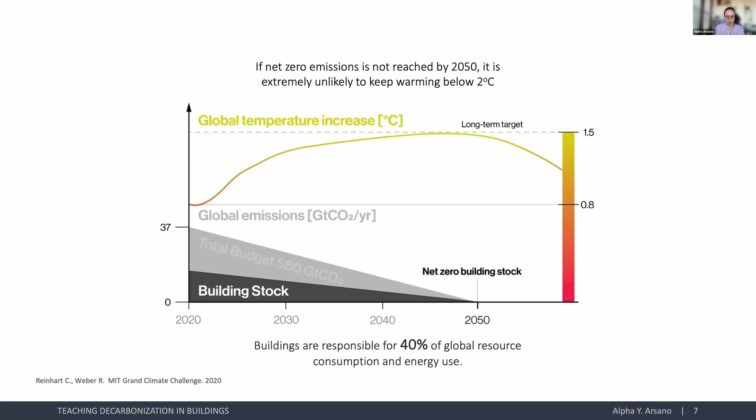And thinking about limiting global warming to less than 1.5 degree or 2 degree centigrade by 2050, we know we have to think about decarbonization. That's the only opportunity, building net zero buildings, retrofitting buildings, where we can get to that goal. It's just reiterating the theme of the conversation we have today.

So really, this leads me to think about, I think Emery has very nicely articulated it in his presentation, the importance of design. So it's not just about technologies, but it's also about really giving the platform for good design, efficient design. So empowering architecture and evolving the design attitude is so important. I believe it's important for us to always think about passive strategies as much as possible and always complementing with technologies whenever it's needed.

So as an illustration of that, part of my work has been developing an online web tool to support bioclimatic design rather than only focusing on simulation tools, which require some computation power of our gadgets, or even some knowledge or skill to run the simulations. Creating a web app that can be accessible anywhere for anyone who has access to, say, a cell phone or a laptop that's internet connected, to give them the opportunity to explore various building strategies would be so helpful.

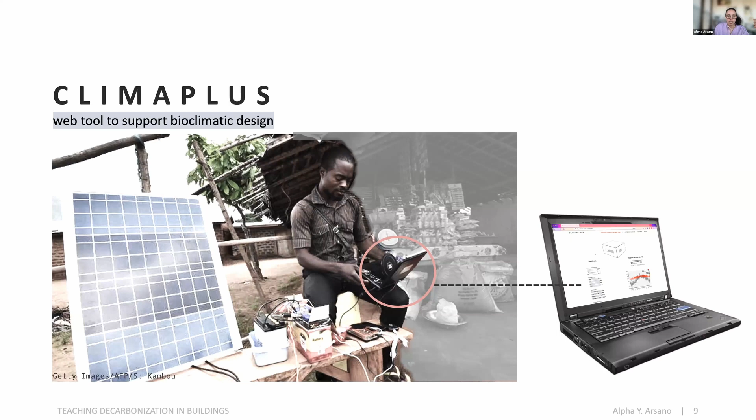An expansion of that is really implementing such an approach even in the learning space. I think taking students through these three different stages of learning is quite critical. So the first part, of course, we emphasize skill building, and the basic physical principles would be learned.

And then the opportunity comes to apply whatever they learned through evidence-based design, which could be using this web app or using these BIM environments for building performance simulations. And third, the goal would be to take them across, applying what they learned and perhaps come up with new innovative ideas in their course projects and assignments.

So one approach to really teach them about the different sustainable building strategies and the importance of decarbonization is implementing different games in a classroom. So instead of just providing assignments, my colleagues and I have been using gamification as a way of teaching. I'd like to present three different games or challenges that could be used in a classroom, or the games that we've been implementing in a classroom.

The first one is a climate game, then a simulation game, and then an alternative for the simulation game, a ClimaBox challenge. So usually the ClimaPlus would be administered at the beginning of the course, where students are yet learning about different parameters of the climate and learning to read different climatic charts.

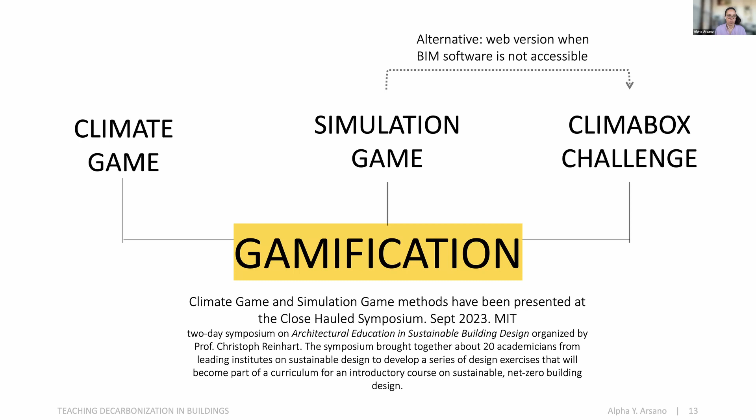So the first two approaches, the climate game and the simulation game, have been discussed and presented at the symposium at MIT last September. And perhaps there would be more documentation coming out of the symposium. So to dive deeper into these different games, the first one, the climate game, is quite interesting. It's the simplest, but at the same time, it's the one that sparks so much conversation in a classroom setting.

Now we know climate data is publicly available. We have more than 3,000 locations made available on climate.onebuilding.org, which can be easily downloaded. So we give students the challenge of identifying a location, comparing climate, describing it, and also coming up with some design strategies. So what happens is we prepare a couple of climate boards without disclosing their location.

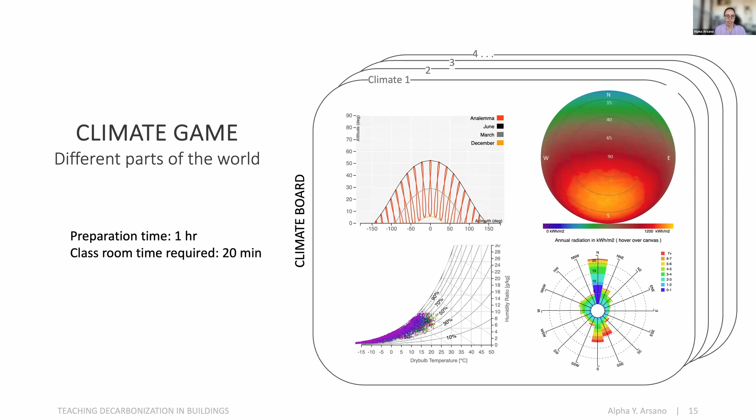Usually the preparation for the game could take about 1 hour for the instructor outside of classroom, and it could require about 20 minutes to run the game in a class. So once the climate boards are prepared, we ask students to look at all the climate boards, we give them a series of options of locations, and we ask them to match them.

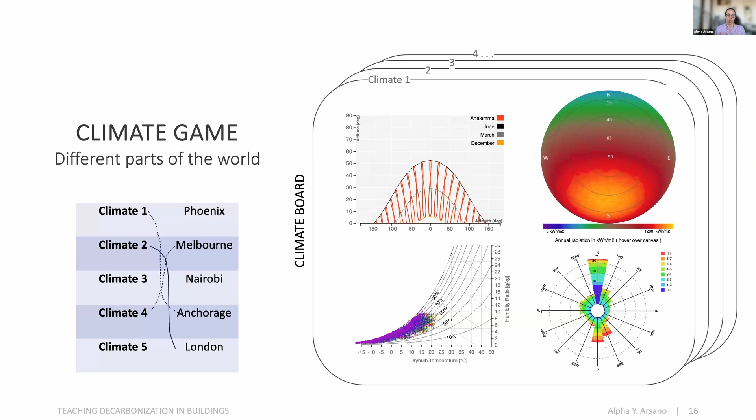So they would now have the opportunity to look at, okay, what's the sun path? They look at the psychrometric chart. They look at the cumulative radiation map, wind charts. We provide temperature charts. And usually, once they have spent some time exploring the charts, they should be able to identify which climate board belongs to which climate or to which location.

But we learned that, for instance, Phoenix and Nairobi were confusing for most of the students. And we also identified that wind charts are usually the most difficult to associate for students. But in any case, we would dive deeper into any of the climate charts, spend some time really investigating which climate could be identified and which parameter they should really look into. So this becomes a fantastic opportunity to really think about bioclimatic design, like the early stage identification of climate parameters.

So I personally use the ClimaPlus web app extensively for my teaching, but the CBE Clima tool, which is out of the UC Berkeley lab, is also very powerful. People could implement the Ladybug tools. It's also possible to use Climate Consultant. There could be different options out there. These two web apps are the ones I'm very much familiar with, and it's possible just to compile various climate files into climate boards to really create the game.

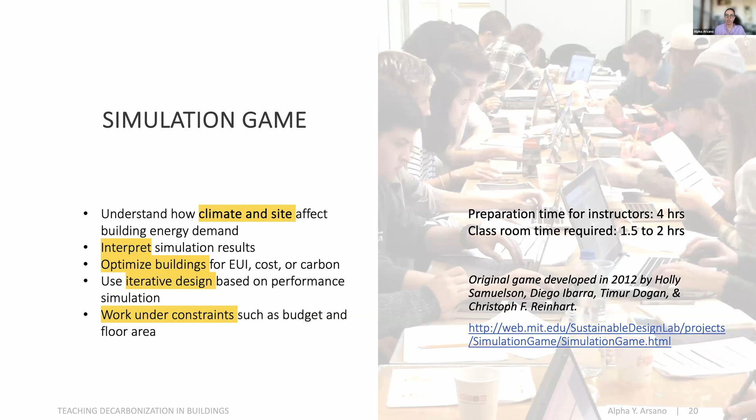They would learn how to translate and interpret simulation results. They'd also explore EUIs, cost and carbon as a way of optimizing building performance. They would explore iterative design process as a way of performance simulation. They'd also learn to work within constraints, such as budget and area limitations.

The simulation game, as it's designed right now, runs within Rhino with a plugin Climate Studio out of Solemma. It also has a plugin for Grasshopper, which runs. I'm able to show a quick demo if anyone is interested, but I'm also happy to share some files afterwards.

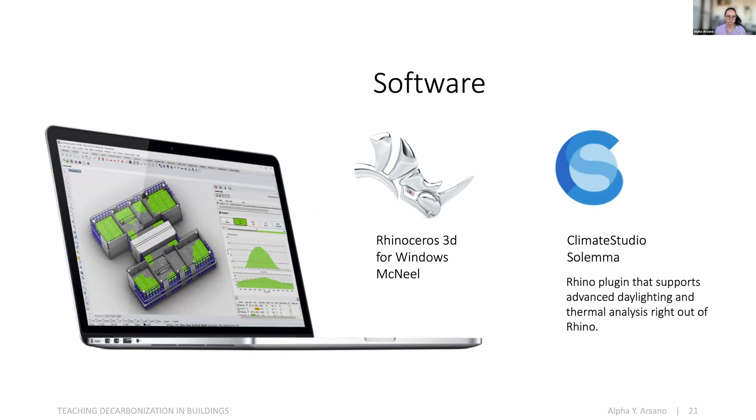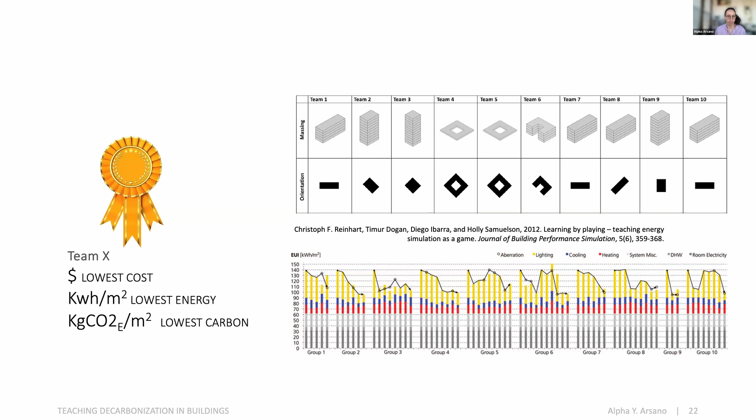The third game, which could be taken as a good alternative to the simulation game in a scenario where our students or learners don't have access to Rhino or Climate Studio, or we don't want to get into the EnergyPlus simulation space, is to use the web app using ClimaPlus.

So I implemented an engine at the back end, which takes in design constraints, such as climate, the program, and some comfort requirements by the occupant. And then we have a non-geometric abstraction of a building, which helps translate some of the building performance into the analytical model. So those parameters include the performance of the envelope, lighting loads, plug loads, thermal mass, infiltration, and conditioning, heating and cooling, or natural ventilation strategies.

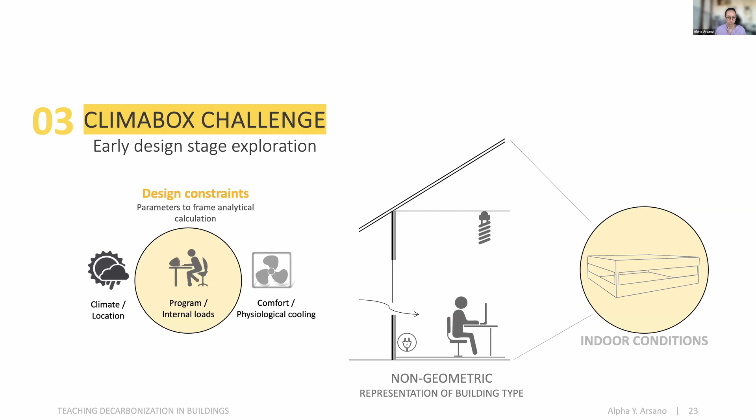So this abstraction of buildings, it's like a shoeboxer in a way, but with the goal of really promoting comparison of different performance strategies. It could represent a full building, but it could also be representing parts and sections of a building typology. It could have different dimensions, different orientations of openings, and window-to-wall ratios.

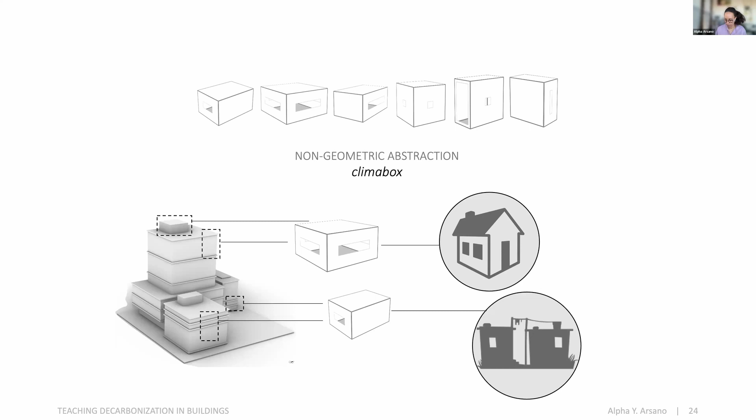So once the student accesses the ClimaPlus tool, ClimaPlus.net, they would be able to input or select a location. For instance, in this case, I'd like to show maybe how a scenario can be compared. So if the assignment is, say, optimizing a building for Boston, they can pick a location, Boston, then it leads to a settings window where they can select the dimension of the Climabox, and they can choose different window-to-wall ratios.

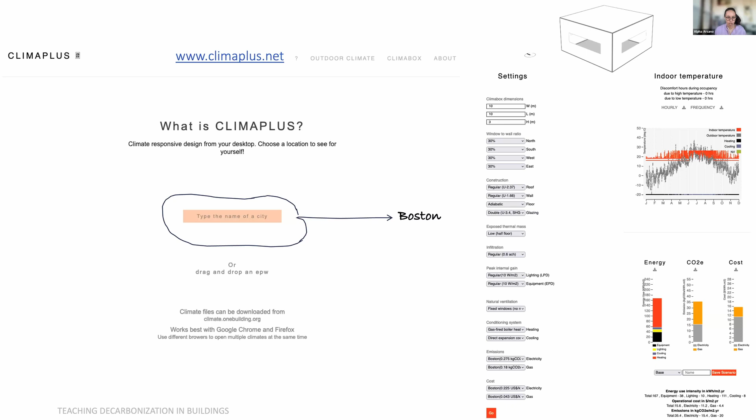They'll be able to specify construction, specify the presence of thermal mass. They can also pick different conditioning. So let's say for the base scenario, a group, maybe a student, starts working at a low envelope performance scenario for a fully conditioned office building in Boston.

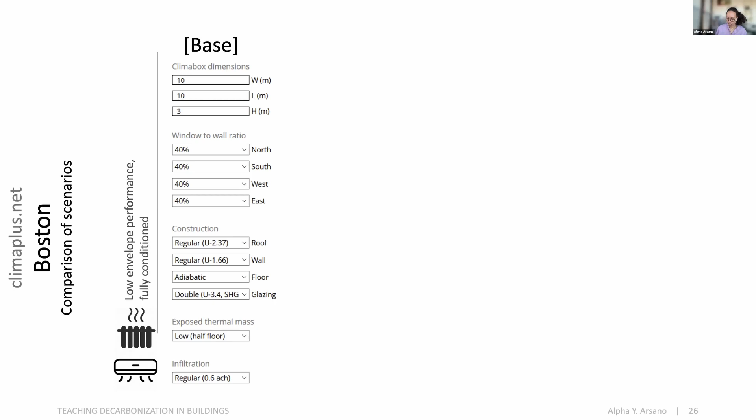And then in their second and third scenarios or iterations, let's say in the first scenario, they change the construction, they upgrade the construction to a good performance envelope. They also improve infiltration by making it more tight. Then in the second scenario, they could add a bit of thermal mass. They can also make it hybrid by adding operable windows. So instead of just relying on active heating and cooling, whenever the climate permits, natural ventilation would be used.

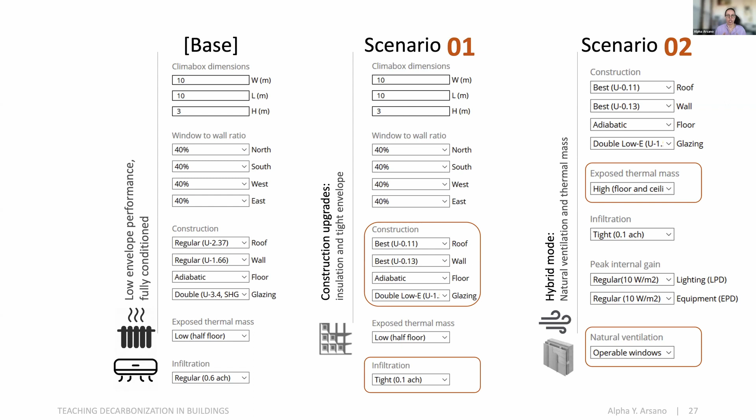And as a result, these are the output results for the three scenarios. As you can see, in comparison to the base scenario, on the third scenario for the hybrid optimized building type, heating has been reduced close to 80% and cooling has been reduced 40%.

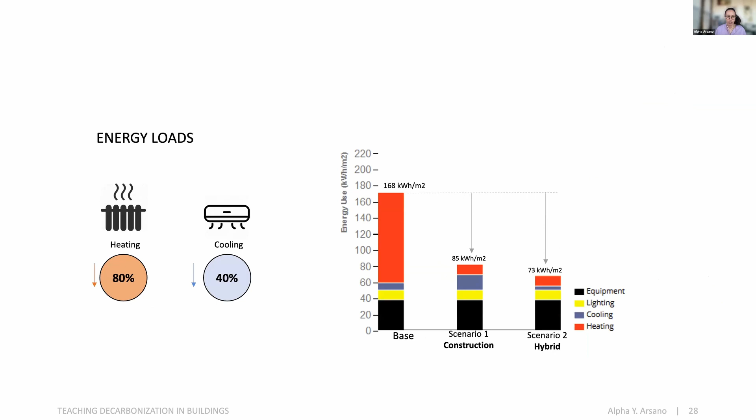And even taking it further, what's more exciting for me is for students to be able to compare fully conditioned versus a hybrid system. We know every climate offers at least a bit of opportunity for having natural ventilation, if not fully naturally ventilated. So in this scenario, in addition to looking at energy loads or operational carbon emissions, they would be able to look at discomfort hours due to high temperature.

So now the conversation becomes even more interesting because, do we want to have a hybrid system where there might be a couple of hours with higher temperature versus having more heating and cooling involved? So I think the conversation on bioclimatic design could be expanded even beyond having mechanical systems in the building.

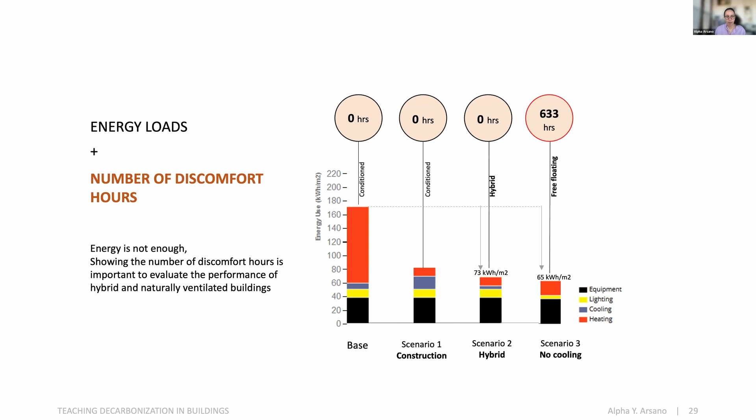So one thing which has been really successful was implementing some of these game ideas and these tools in an open online course, a MOOC course that was launched in collaboration with the Sustainable Design Lab, the MIT Energy Initiative, and edX. And with that course, we were able to reach more than 46,000 learners in different parts of the world. Close to 170 countries were represented. In the earlier versions, the majority were from the US, Brazil, and India, but the goal is for us always to have more learners coming from other countries as well.

And this is where I see, maybe as a closing statement, this is where I also envision my contribution to the BDLA, since it's a resource that's globally available, thinking about making these strategies expanded and available for even learners outside of the US.